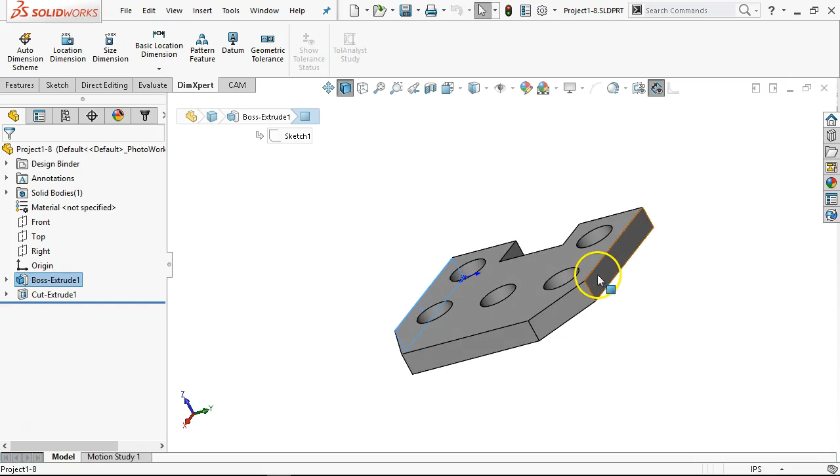For any kind of production, we may jump up to 5/8 and order 5/8 by - our width is just shy of 4 inch - so if I could get 5/8 by 4 inch wide, I could sneak that in there. Then I would have a bar stock that I'd be cutting off to whatever 5 or 6 inches, leaving a little bit oversized, so not quite 4 3/4. I can come up with a bar stock so I wouldn't be recycling as many chips on an 1/8 of an inch as I would with a 1/4 of an inch, but I'm a little bit closer. I'm also now holding on to, instead of a full maybe 1/8 of an inch, 60 thousandths, so my tool is staying far enough away from the vice jaws.

Whether we're given that information and the machine shop manager or production manager comes in and says here's your stock program, or we sit down and go through that same thought process of what am I going to pick for material size, and how many are we going to run - first question is how many are we going to run? Are we running 1, 5, 10, 100, 1,000, 10,000? That's all this part - this part is all that machine is ever going to run in its entire life. Then we make decisions based on that production schedule.

Tooling comes into the next place. Do I do this with one? Do I need to make 2 tool changes, 3 tool changes? We're going to assume aluminum. But if this was 440 stainless, I'm going to make a different set of assumptions, different choices in the tooling and the rigidity of the setup, and just about everything else that we go with.

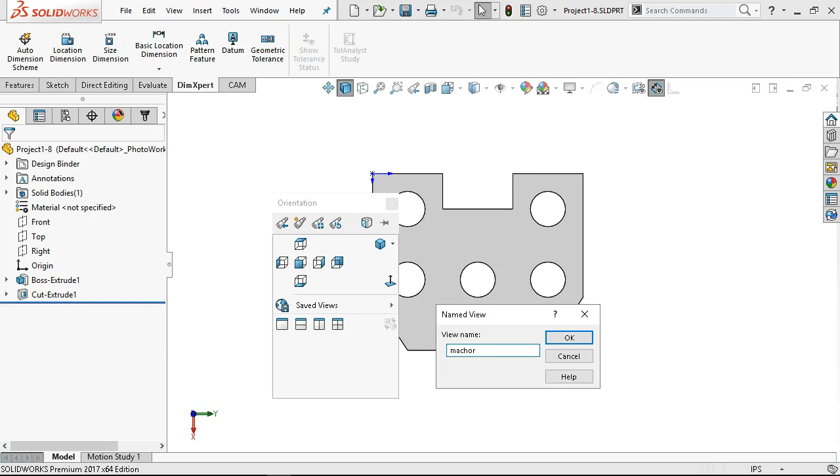The process then is to hit the space bar, and I'm going to have a saved view. Upper row, new view, and usually I just call it 'machine orientation,' something like that. So that is the orientation I'm going to machine in. What that does is I rotate around and see something over here. I hit the space bar, and I can get back to that view because it's now saved as a semi-standard view.

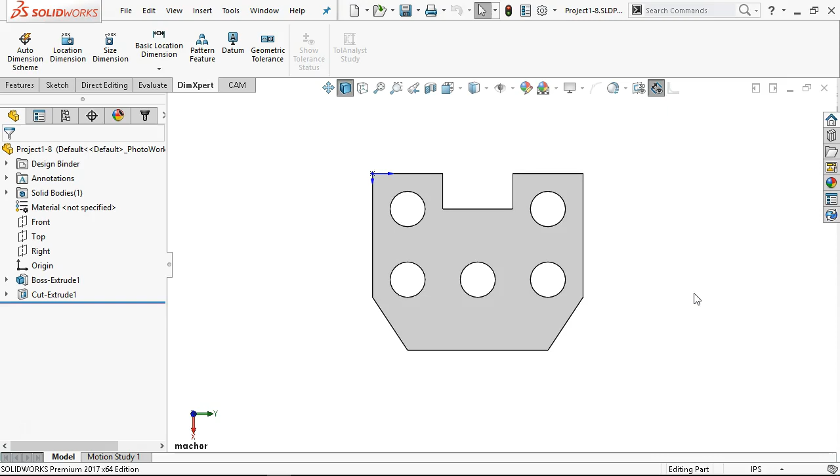Machining from this direction, what am I going to do with these corners? My round tools do not cut square corners. So I go back to the engineer, I go back to the machine shop manager, I go back to the customer, and I say, hey, what's the smallest radius I could put in there and still have the function? Oh no, you can't have a radius. Well, can I overrun the corner and not generate a stress riser? Well, no, we've already done it that way.

All right, then in the process of coding, whoever is doing the coding, we sit down and go through our manufacturing processes. I'm going to run this out, and then I'm going to have to set up another operation to come in and blow out that center section.

That leads to the question of, do I just run around the outside as a profile and leave that in place, or do I go ahead and cut most of it out, knowing this is going to be fairly efficient in a laying-flat orientation? When I set it up on end, I'm going to lose that rigidity, and this is going to sing more, so I may lose some finish even as I'm squaring out those corners. Well, I'm going to say you can go put an 1/8 inch radius in there if you want to, or we'll set it up as another operation.

Yeah, pretty much. But even stacking them up, gang milling a group like that, if it's a tight tolerance, and I stack them up, I get a little bit of angle, I get something on there. I'm not sure that I'm going to trust it as much as an individual, or even two. So the gang milling is on the table if this is a fairly open tolerance, and I can close it in the vise in such a way that we can get a clamp across the span of 10 or 20 parts stacked up without getting some kind of angularity in there or having one fall out of line and shifting.

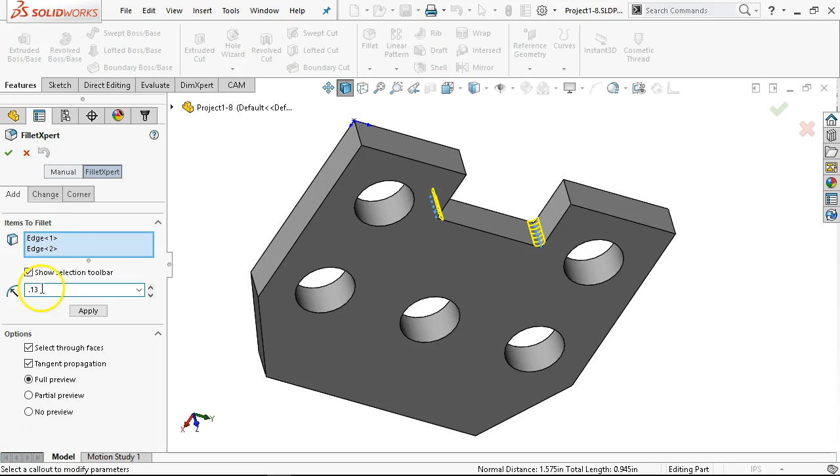So as a design for manufacture that we were talking about earlier, if I need to put in an 1/8 inch radius, this is one where I bump the tolerance up to where I have a little bit, 5/1000 over, on a 1/4 inch end mill, 125. Having that little extra puts just a tiny arc in that corner, as opposed to coming to a stop or a sharp change of direction. It's very minor, but if I have at least that much, I can use it to my advantage.

This makes it to where I could potentially machine this with one tool. But is a 1/4 inch tool going to be the most efficient to run this part? Probably not. So if I can blow this out with a 1/2 inch tool, change into a 1/4 inch, and come back and maybe do this relief, I can live with that. I'll get most of my geometry. I'll have a larger radius in here that I have to contend with, but then my 1/4 inch tool can come in and just feed out.

So I have a plan. Is it a good plan? Won't know until I get it to the machine and actually start making parts, and see if the cycle time matches the estimate from the operations and the CAM software, or if I missed it, I can't run that fast, or I need to come up with another strategy.

To that end, I will give away my favorite... oops, wrong one, did not want to hide that.

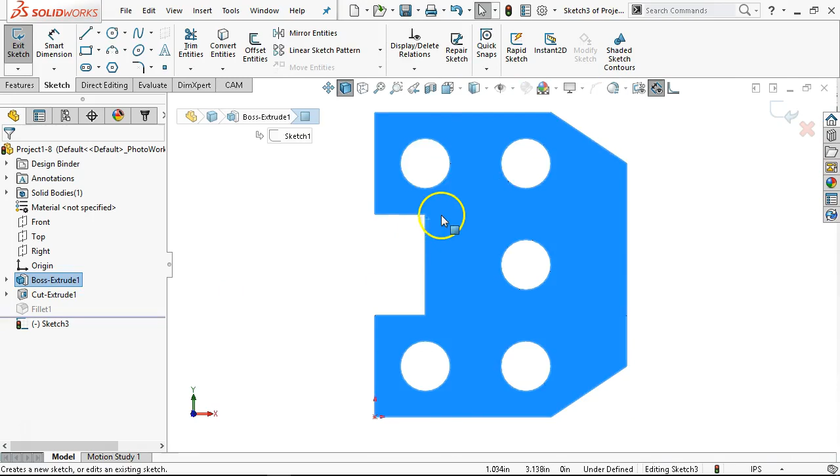The other thing is, if that needs to be a square corner, it's going to intersect, and I'm allowed to put in the corner reliefs. I like to do a small section, so a 3-point arc, go back to the end point, drag that out a little ways. Rather than just drilling a full hole in that corner, I want my 1/4 inch end mill to be able to just take that little dive in there, or mostly in there.

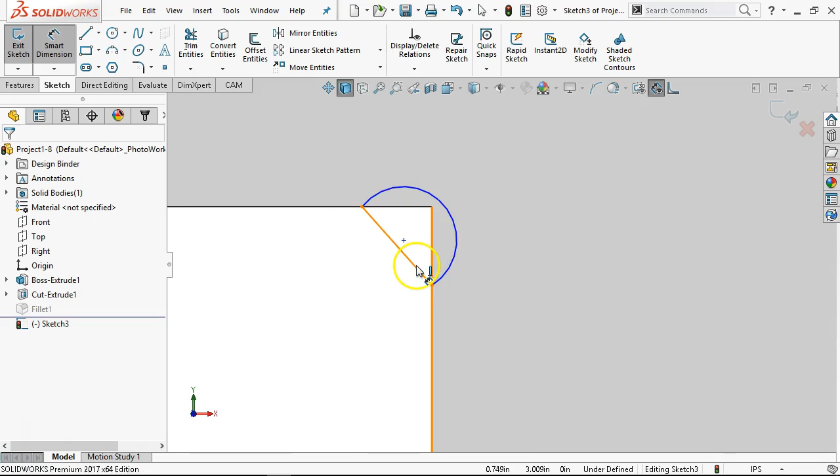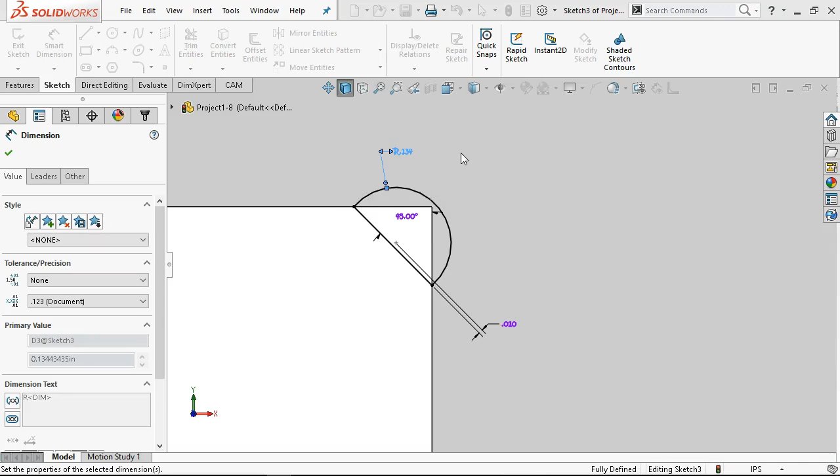Let's see, we'll put 10/1000 of clearance, and not have to change anything too drastically. So 45, and then we said we're up about 130. We'll set a center line. And all of that gets mirrored.

Features, extrude cut, through all. Now, the documentation side is I made this change per a request, a manufacturing request. How do I make sure that this gets back into the engineering documentation? If this is the engineering document, I've just made the change, it was approved, there shouldn't be an issue.

But if we have a set of policies and procedures that says I have to submit this, it has to come back, somebody has to enter it, somebody has to approve it, and then it gets back to me, I can't just make this change. Somebody's got to write it up. I go through the whole process of getting there. So if I make this change on my own, I may be opening up a can of worms. So I don't make this change on my own.

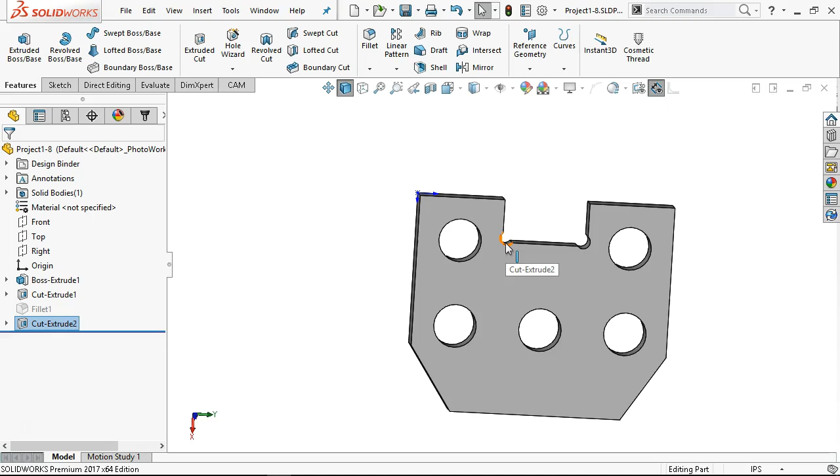Would you explain again what is the tool path that allows you to make that is preferable or desirable?

So if this is fitting into a corner, I want to be able to go into the sharp, so the corner of the part that fits in here will go right to that piece. The 1/4 inch end mill will come in, it will remove most of this material depending on how I tell it to do the operation. It gets down into this corner, and it'll take just a little zig, as opposed to being a full circle and either drilling out the corner and having a complete overrun. To me, this is less interference, less material.

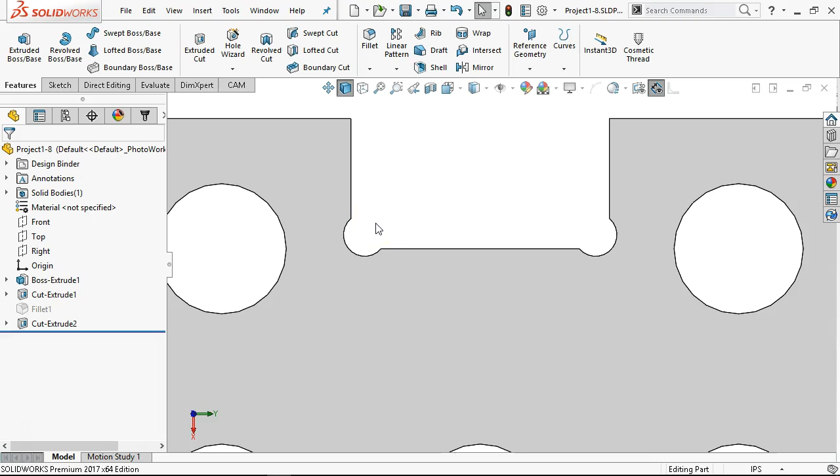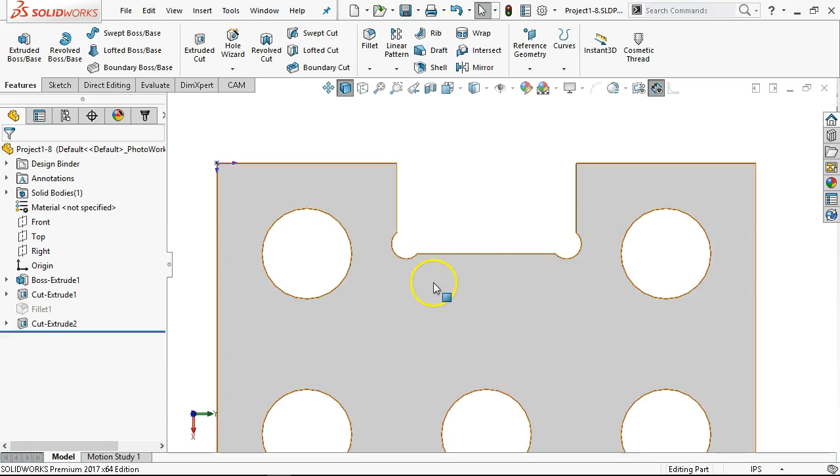From a stress-strain standpoint, since I've taken less material out, this is still going to be stronger, less of a stress riser from being a sharp corner, and I've also improved the machining process. I don't have to take a drill and drill out that corner or go into that corner some other way. So I call it kind of a truncated Mickey Mouse here, as opposed to, well, let's go ahead and suppress one more time since I like my corner geometry.

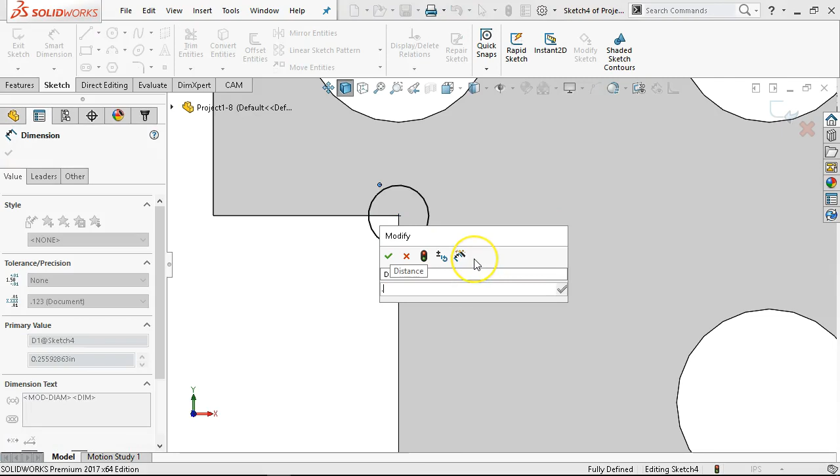A lot of times you'll see that it is quicker, it is easier just to go, let's put in a 1/4 inch tool, we'll put in a 1/4 inch drill, and we'll blow that hole through.

And let's see if I can overlay that sketch on top of it. I probably have left at least 50, maybe 60% more material. And I have a more efficient toolpath. So I could argue it both ways.

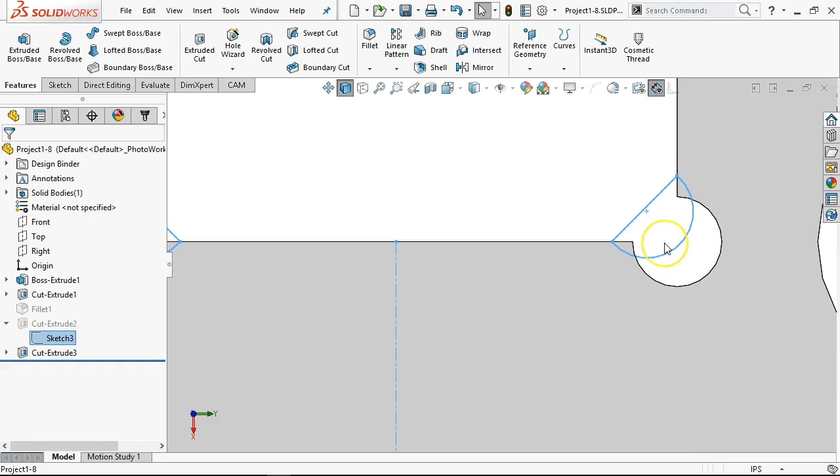If this was a manual operation, yeah, I'm gonna be okay with doing the full corner, because manually I can set up a drill and blow those corners out. But when I have access to the CNC, I'm gonna go with the truncated version.

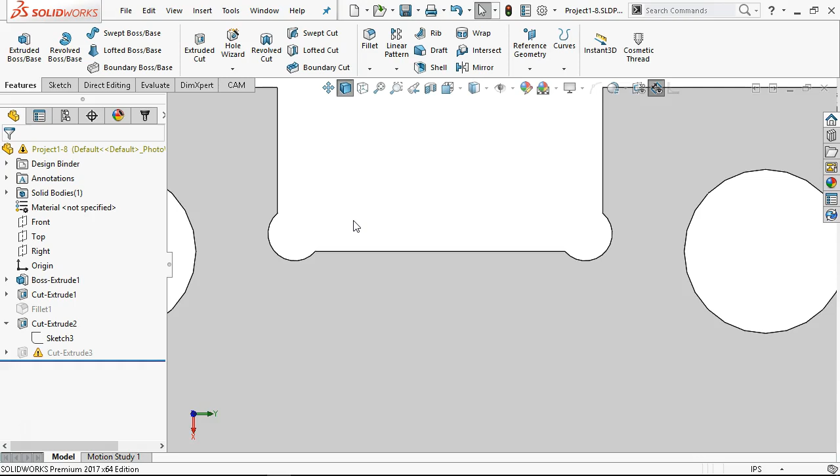So again, this conversation needs to happen way before we get to this point. When we're doing the initial planning, either the machine shop manager or production, looking down through these parts - can I do this? Can I get away with this? This is going to drive decisions that we make in our machine processes further along.

All right, so we'll see what the results are. So since that one is erroring because I'm using similar geometry, that can go away. And the absorbed feature is the sketch, so we will delete it as well. And put that in. All right, so we've made some choices.

We have 5/8 inch material. I have 472, so I'll probably go ahead and run the face cut across the top. What did I say was the width? Just shy of 4 inches. Well, we can find a 4-inch or a 5-inch shell mill or face cutter to take one pass on. I'm good with that, we'll load that up.

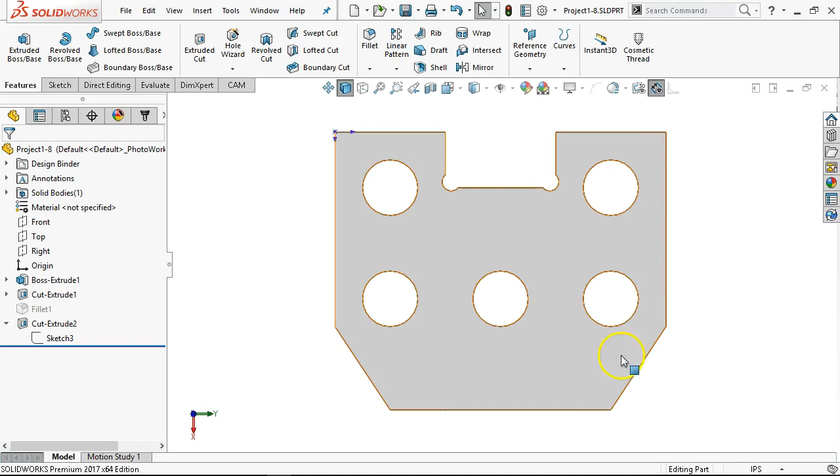We'll take the 1/2-inch tool, run around the outside, get into the corners. The 1/4-inch tool can come in.

The bores then 787. Do I load up a drill or put the 1/2-inch tool into that as a helical spiral? I don't plunge end mills like I would the drill, but I could set this up in a pretty aggressive helical spiral and blow that material out, finishing it as fine as I could with the drill - 787 plus or minus a thou or two. I'm going to put the end mill in there over picking a drill. One less tool change, one less tool to set up, one less tool to be concerned with wear. So that's kind of my decision tree.

All right, so we have a plan, we're into the operation. So we come over to our HSM tab, set up the new job, and then we went through the process. No additional stock - I'm going to control stock at the machine.

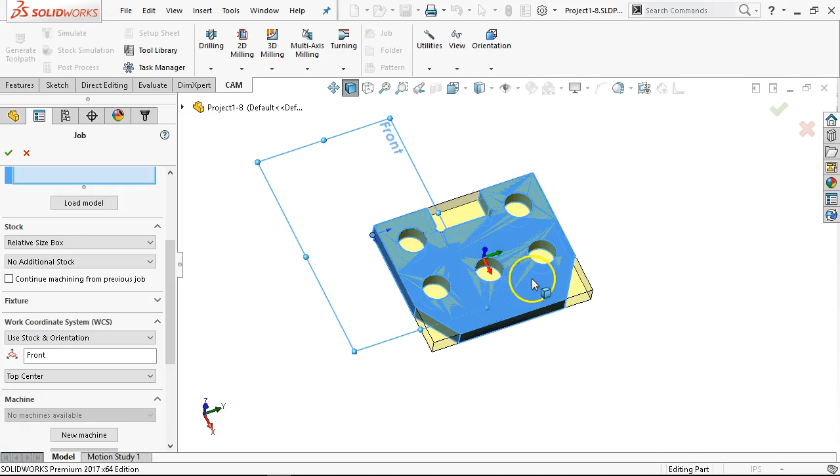So when I set this up, whatever we saw cut, I'm going to measure, and if I find one that's way undersized or way oversized, I'll kick it out to the end. But the majority will be within 10,000ths of each other, so my numbers are going to be fairly nominal.

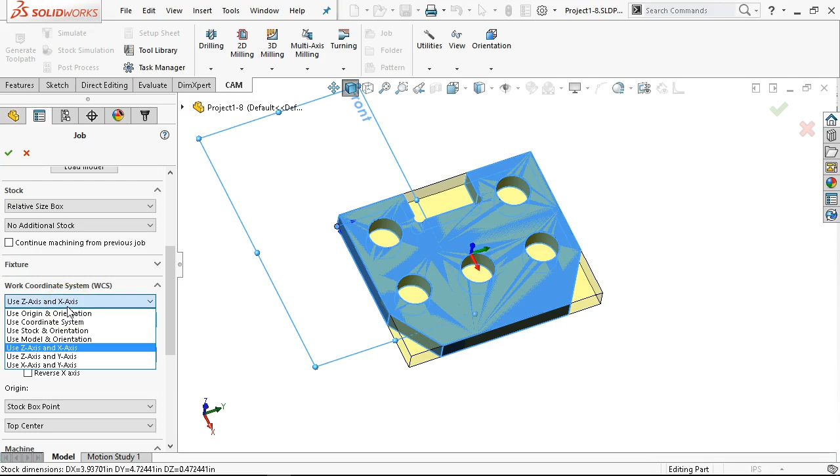We have, let's see, stock and orientation - that went to the front plane. So origin and orientation, if I set up a coordinate system, then I would have to pick for it. Z-axis and X-axis, that's going to be my preference. If we wanted to pick Z-axis and Y, X and Y-axis, we could.

But what that does is it allows me to select that face. And I think last week on assignment 1, I got those backwards, so kind of go through and experiment with the different selections there. But I think I use Z-axis and X-axis. I've used it for so long that I don't even look at that anymore - it's just one of those settings that's in the background.

We picked a face, then the next one is to pick the X-axis. It shows the direction, and if I reverse that, then my X-axis is going the correct way. And then I will go to model origin, or no, selected point - I want to pick where to place it, because model origin down there doesn't help me, it's at the bottom of the part. I want to be at the top of the part with my X-axis going in that direction. That puts it where I want.

Okay, so let's see which one will do this. I think these stay modal - yeah, or they should stay from one job to the next, from one session to the next. We'll find out.

If we have a naming scheme for our programs, most of the posts are going to accept a number for the program name, and then we can put the comment P1-8 setup 1. Work offset will stay with G54.

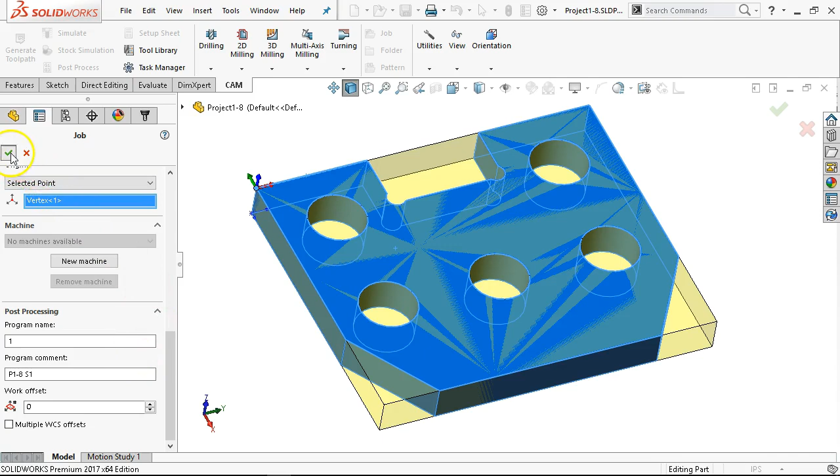All right, first operation, I'm right-clicking just out in the area. In other programs you'd click on a specific button, but I guess they changed it - you can click pretty much wherever you want now. So I stand corrected. We're going to do the 2D milling face operation.

We talked about last time running back and forth, so this time we're going to set up a 4-inch face mill. We're going to see what we can find for a face mill, and there's nothing in the list, so let's cancel out of that.

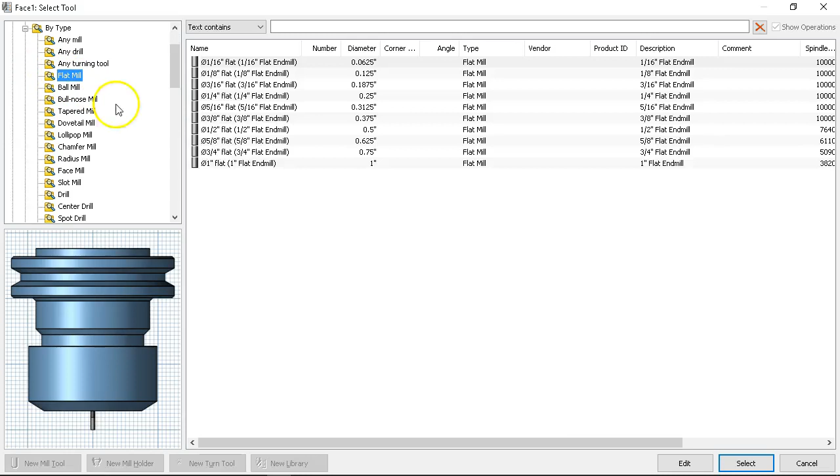Well, let's go ahead and pick a tool. If I don't have a tool selected, the operation goes away. At that point, I can at least preserve the operation as I've set it up. The 1-inch tool goes in and starts to run. I don't have to, even though I'm at the very start, flat kick that out.

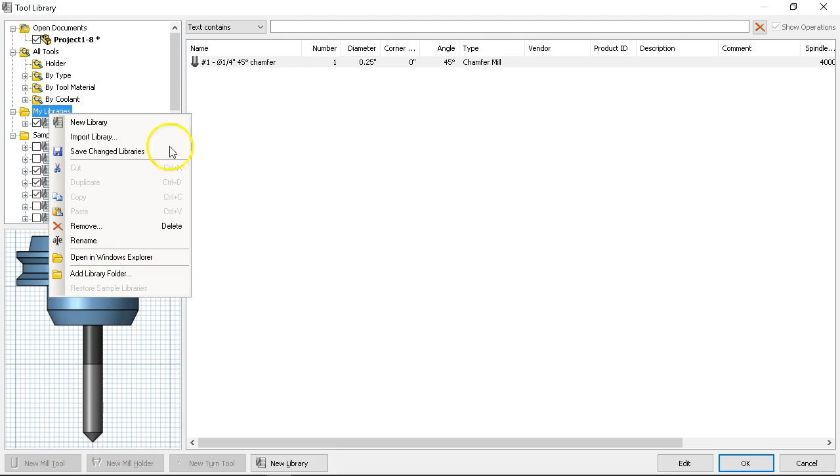So back into the tool library. We have a custom library started, so my tools will go in here. Most all of these folders are going to be set to read-only permissions, so they don't let you change the default. So my library, right-click, create a new library, and then this will act as the library for these custom tools, or a job list, or whatever.

In here then, select those - there we go, new mill tool at the bottom left. And we're going to set up for, because I want this to go to the next number in the sequence when I add it, these are all zeros. Numbers, zeros, and these will all line up to 0.

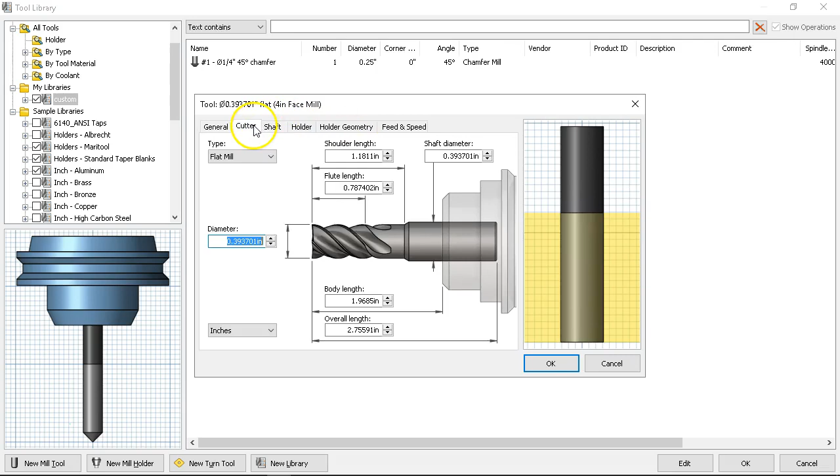And we're going to call this the 4-inch face mill. I don't know how many flutes, probably 6, at least 4. All right, so the cutter, we go over to pick our face mill.

Try again - so multi-insert. Flute length, I'm going to stay with their numbers because I'm not looking for interferences. If I have this shell mill in front of me, I can take measurements. What I'm really concerned with is that I get it to 4 inches, and that if there's any back angle or whatever, I have an actual number for what it will take for a pass.

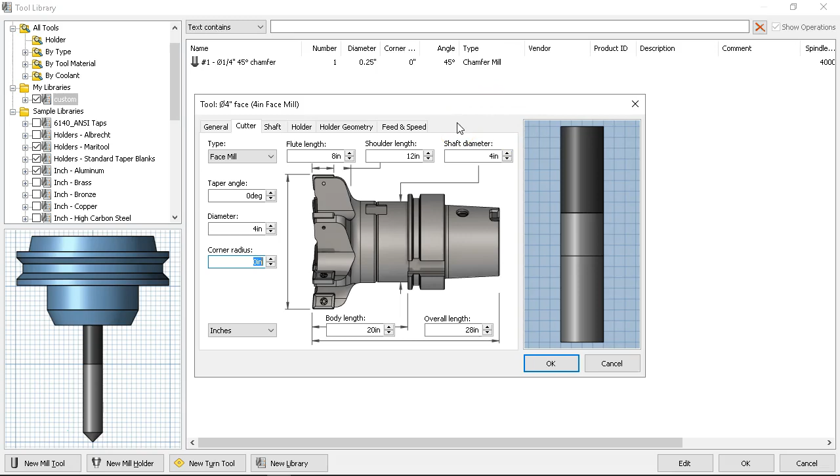I don't want to set this at 4 inches and find out that with the back angle, or what are they calling it here, the taper angle, that I can only cut 3 and 3/4, and then it ends up that I take the first pass, it doesn't clean up all the way, and then I have to go back and tell it to take 2 passes. All right, so we're going to verify that it will actually take a 4-inch wide pass.

Shaft, not a big deal. Holder geometry, feed and speed. If I know that I'm running this pretty consistently, this may be where I would set up this tool for aluminum in my C2 inserts, or set it up for steel in C5 inserts - one running faster, one running slower.

All right, so don't need 2 decimal places. Don't really need 2 decimal places on the ramp either. And then cutting speed, 13 thousandths per tooth. Let's drop that down to 2 thousandths per tooth, but we have 4 teeth, 5 teeth, something like that. And so that's putting me at a cutting speed of about 7. Bump it up to 8.

Go ahead and stay with the ramp feed, we're not going to plunge this. So if it does accidentally plunge for some reason, the slower the better. I want to catch it and watch it try to plunge for a long time before it actually touches material.

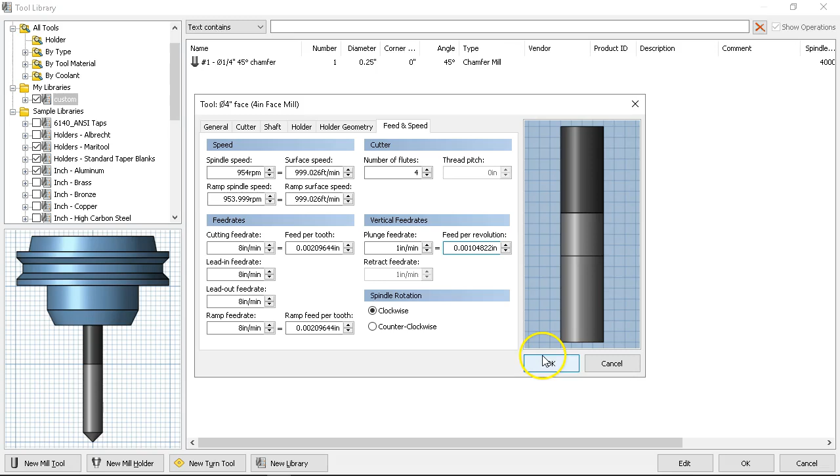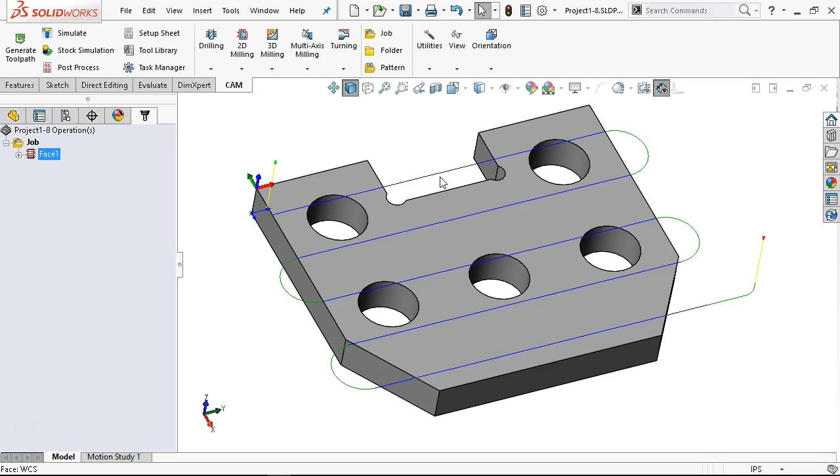All right, so these are guesses. I've gone through on my numbers, and we get it out to the machine and say, yeah, that ran fine, left a beautiful finish, got exactly what I wanted out of it - or no, I overrode it up 10%, I overrode it down 10%. I get some actual numbers, I can come back and feed it into the database. So next time that I see that tool and load that tool, it will have those similar numbers in it.

Okay, edit, back to the library, go to my custom - now I have a tool to select.

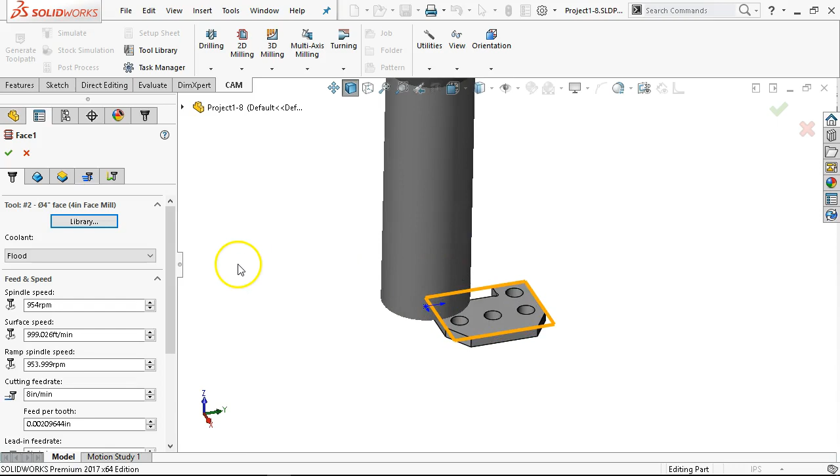Well, it doesn't look like much, but that's pretty much all I need. It looks like a big end mill. All of the numbers that I set in the library came across, so I don't have to change anything.

At some point we're going to start building our own library of tools that we use. If it's the side mount tool changer, having a tool crib with the first 8-10 tools already loaded. Carousels don't lend themselves that well, but maybe the same thing applies for the first 2 or 3 tools that are most common, and we use them over and over again.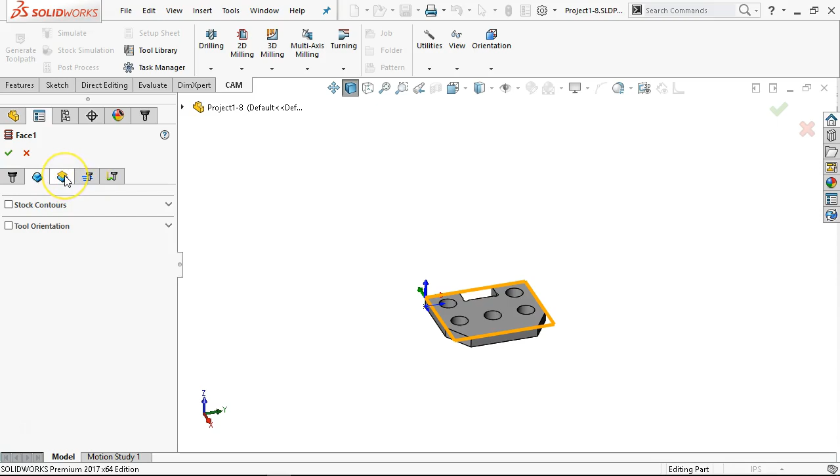For a face operation, it's going right to the stock contour, finds its way around. We're not trying to avoid anything or go through.

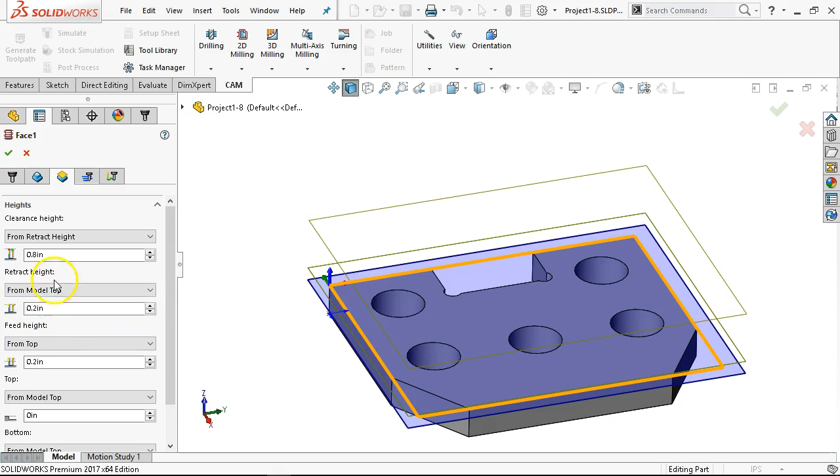Let's see, 0.2 and 0.8 and 0.2, model top and 0.0. I'm okay with that for the facing mill, the extra 0.2. What this is going to do then is the feed height and the retract height are both going to be... let's go, well, that's not great, but it's pretty good.

Feed and retract, I don't need to adjust. But if this really what it comes down to, if the feed height was something I wanted to put at the bottom of a pocket as opposed to a slow feed to some additional depth, the retract would always be up here and I could feed to something lower. That's why there's 2 numbers there.

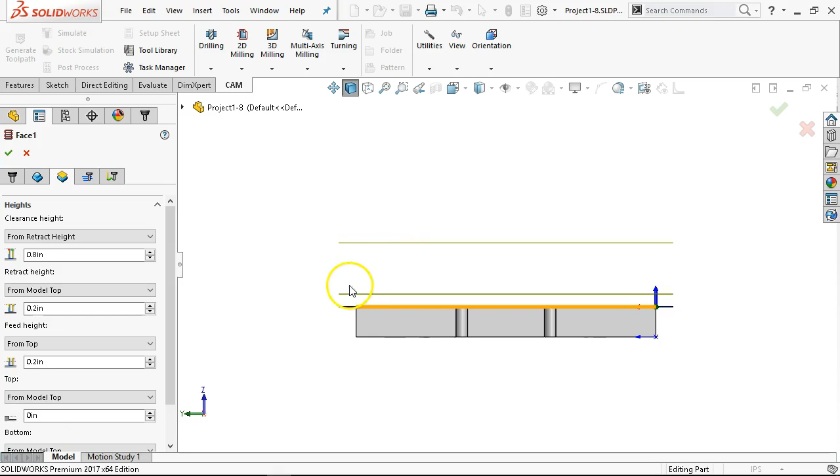As long as those numbers are the same, we're 200 thousandths above the part, the 0.8 gets added to it, so I will see a clearance height of 1 inch and the retract at 0.2. That's going to give me enough to feed in and be able to work with.

Going into the face, full width, I'm going to give it the full 4 inches as a step over so it doesn't try to take a second pass.

We're not at 0 degrees. We'll see what 0 degrees is. There shouldn't be a pass extension. Stock offset, well, we got a little bit to work with. And we're going to machine both ways, so we'll see what that does.

Lead in and entry of 0.4 is above the part. So I'm kind of jumping over the first part, lead in, lead out, smooth transition. Let's see what it generates.

All right, so we come in, it has enough to clear getting into the part. Center line of the tool finds the edge of the part, starts leading out. And since it's ramping out, it should be a transition.

The problem is going to be we're going to have swirl, swirl, swirl, swirl, and then the back swirl is going to be kind of apparent in that last segment. So if I want a consistent finish all the way across, I really need to extend that lead out.

So it would be one of those things we get out to the machine and see pretty quick. So let's see, if I turn that off, and that was the angle.

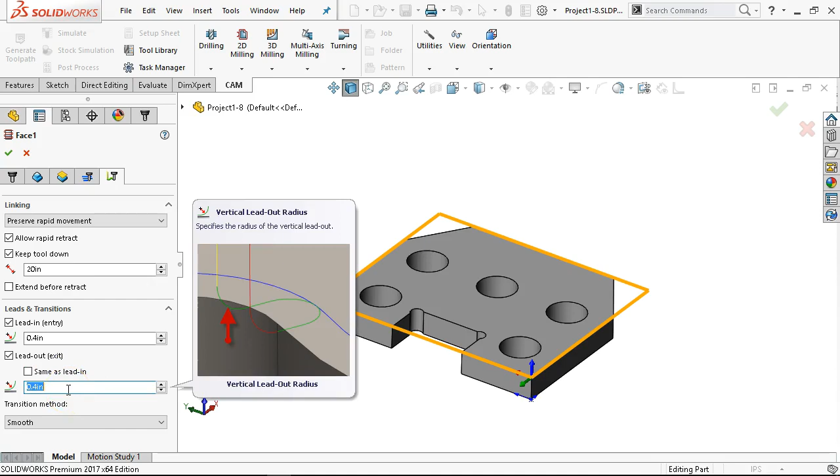Oh, there we go. Extend before retract. That was the one I needed. So this one can stay same as lead in. The button extend before retract should bring it all the way across. All right, so now I have a consistent finish.

The profile then, so I lost my frame of reference. Going to go back into that, space bar, get the machining orientation. We click out, that toolpath will go into the background.

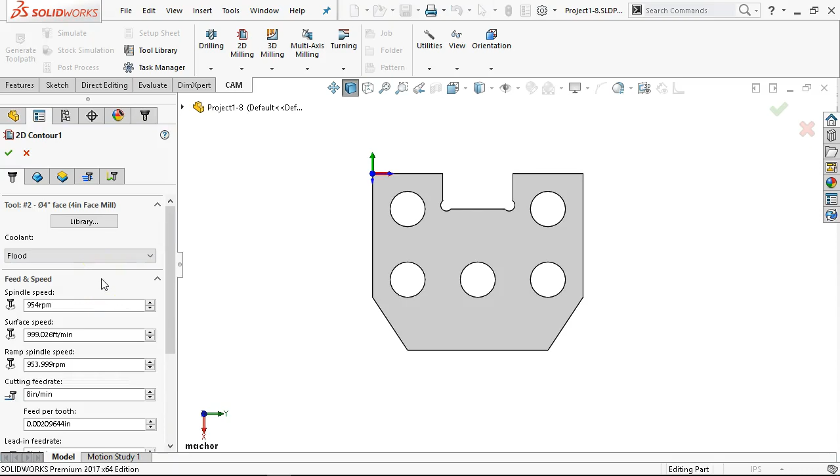Next, we'll go ahead and set up for the 1/2 inch tool. 2D milling, let's go ahead with the 2D contour. And let's see, I want to rough, but I want to finish just on this inside pocket with a 1/4 inch tool.

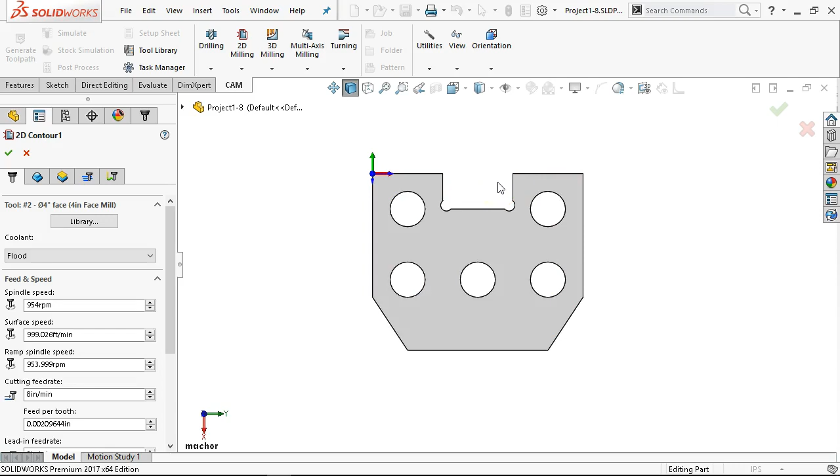So when the 1/2 inch tool comes in and blows that out, when it comes back and finishes the outside of the part, I want to jump across that gap. So I'm going to have to lie to it. I need a sketch. All right, so I don't need a sketch right now, but we're going to here in a minute.

All right, so tool 3 then, we're into by type, flat end mill, 1/2 inch, and select. All right, so it came up with numbers.

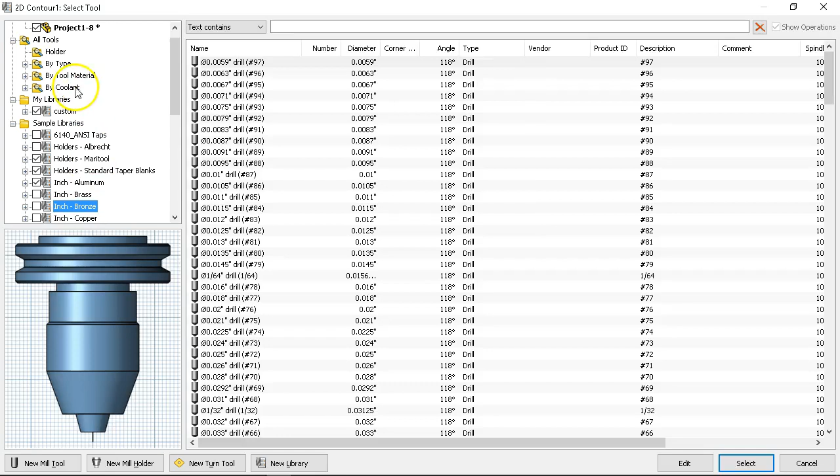I'm going to use this tool again, so I'm going to go back into the library and, oops, I jumped over something. So back into that one.

So at this point, if I change these numbers, I'm going to get a little aggressive on that one, so 1200. I pretty much run the 1/2 inch tool at 9000. I'm going to stay with the 2 thousandths. 54 is a little aggressive for the first part, so we'll bump it down to 30, but I'm going to be prepared to move that back up when we get into full production.

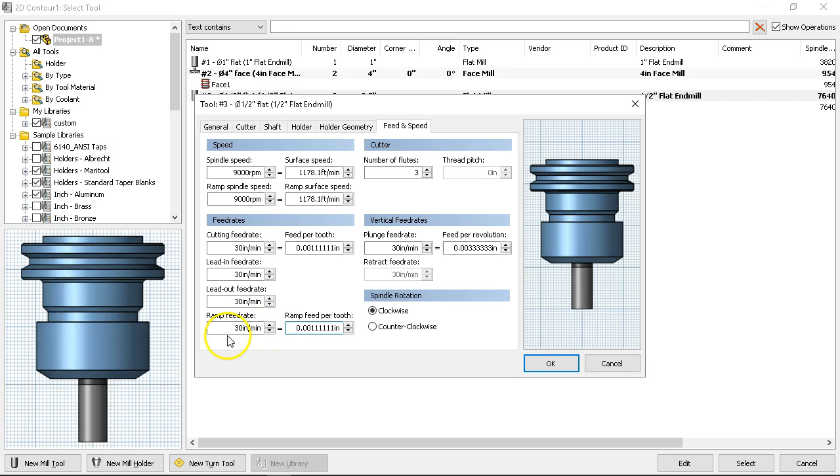All right, so what that means is it should take less than a minute to go around the outside of this part and be ready to finish.

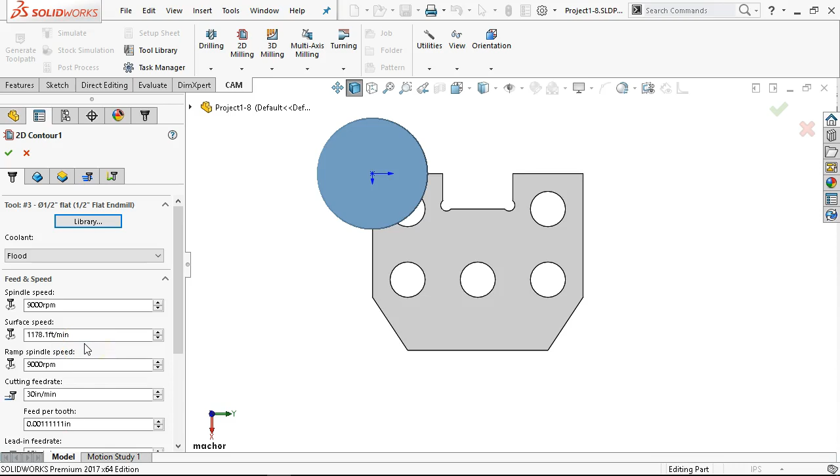Following operation uses tool, but with different speeds. Oh, and yes, we want to update and change. Select - there are my more aggressive numbers. So the next operation that I put in will go back to the current library, not the database library - so where I pulled that tool from, it will come back to this one and reproduce. If I use this number enough, then I'll want to add it to my custom tools or to a machine library.

Okay, the model - I'll rotate over a little bit. I would like to start on this corner, probably just out of habit. And I'm not worried about my reliefs in the corners. It's not going to put that 1/2 inch tool in there.

Tangent propagation says find everything that is connected by a radius. Propagate along Z says everything that's connected on that part. If this was an open profile, I could take the propagate off and say just finish that edge. And there's only a little bit of tangent. If I started here, this would be - no, it still comes to a point. There's no smooth transition, so there's no tangent propagation here. If we had radiuses on each of the corners, then we could have tangent propagation.

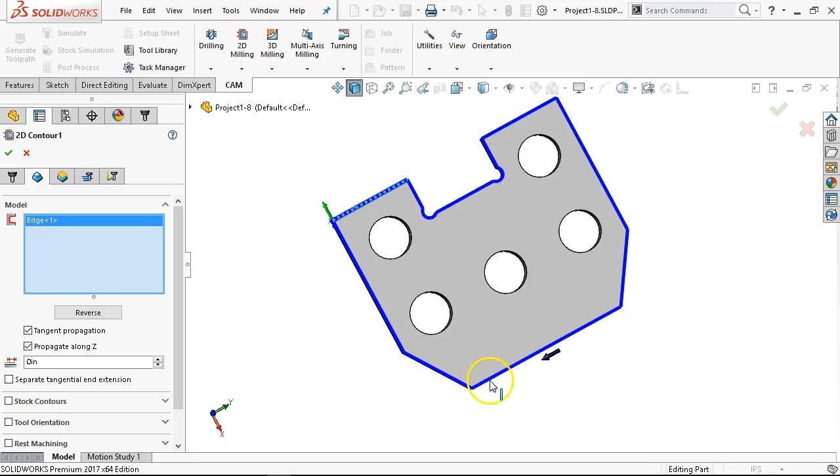And direction-wise, let's go ahead and highlight the edge again. I thought I saw it, but then I started pushing buttons. I'm looking for the little arrow that should be out there. Let's jump out of it, jump back into it, highlight. Oh, I lost it, it jumped over here. Okay, so wherever it puts the little arrow, I'm now doing the imaginary - my tool is spinning this way, running along that face. I am climb milling, and I'm on the side to actually remove the stock. So my quick verification.

472 deep on a 1/2 inch end mill. This is going to be a little bit tough, especially at 30 inches a minute. Do I want to try it on the first shot? Yeah. I may slow that 30 down to 20, 25, but I also may just be ready on the override, the feed override, and drop it down 10% a couple times and work it back up.

The main concern being that going around the outside with 60 thousandths, heavy corner, getting into this pocket, that's a concern. When I turn that corner and go full width, full depth, that's going to spike the load meter. We're probably going to go from 7, 8, 9% to 30 to 50% right on that first turn. That's acceptable, or run it.

All right, so retract heights - I'm not happy with these numbers. I'm okay with the adding, I just want better numbers. So I'm used to seeing 100 thousandths as my retract and feed.

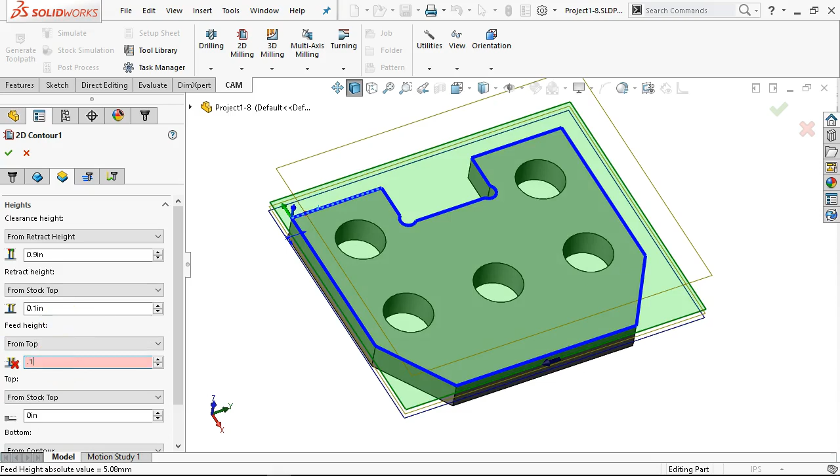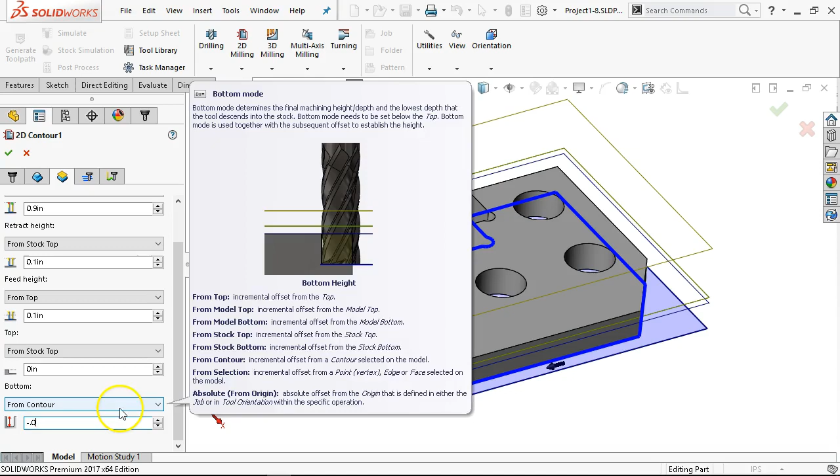From the stock top, well, we set the stock and the model top the same. From contour, and since I picked the top contour, that's 0. So let's go back and clear the selections. And what I really wanted to do was that contour, because that's going to set the depth automatically - I don't have to pick anything. I just have to tell it that bottom from contour, go an additional, what did I say, 30 thousandths to be able to clean up.

And it moved on me, so minus 0.03. And so it takes this cutting plane, this purple-blue cutting plane, and shifts it down 30 thousandths. Tool now overruns, and I still have my 80, 90 thousandths that I'm holding onto in the vise.

All right, so we took maybe 5 or 10 thousandths off the top in the face mill. I touched off, I did my probe, or I just went into the work offset and said subtract 5 thousandths, make sure this all cleans up. Run around the outside of the part, make sure I don't hit the vise. And then when we flip it over, we're machining off that 1/8 inch on the backside.

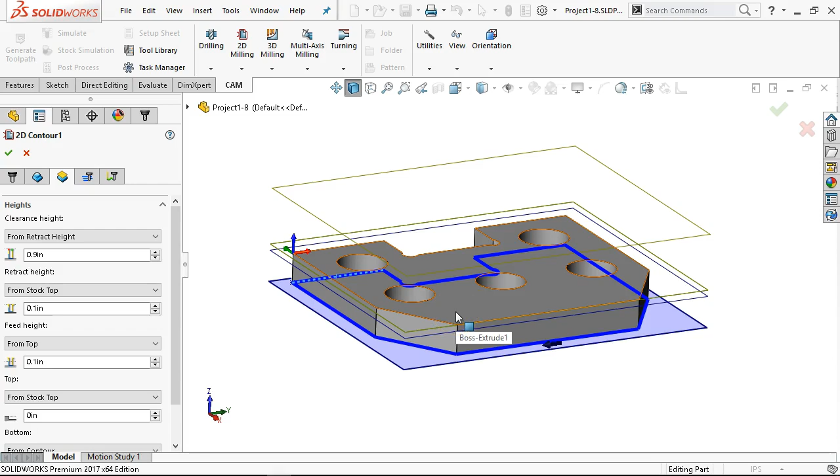Yeah, I missed something - you've got a lot more depth that the vise is hanging onto this. Yes, so this ended up being 12 millimeters, 472. And I said I'm going to pick 5/8 material, 4 inches wide, 5/8 thick. And then we're going to buy bar stock and cut it off to 4 3/4. Right, so that becomes my stock size.

I'm holding on pretty much minimum to be this aggressive, holding on by 80 or 90 thousandths, but I'm trusting the tool and I'm trusting the setup. I'm also trusting that I can close the doors and that the part won't come flying through.

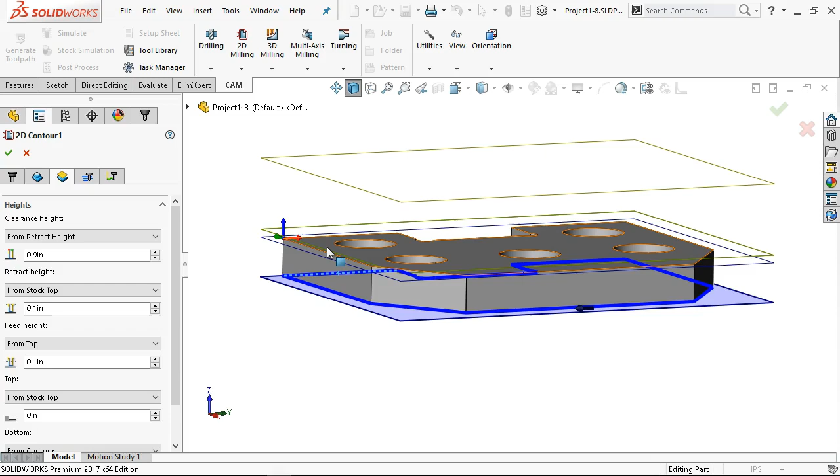The other side of it is we go up to the 3/4 inch material, and I have a full 3/16 to hold on to. And I would say even at 3/4, 4 inches wide, if I really lean on this vise, I'm going to be able to move this part, bow this part. Leaning on the vise at 80, 90 foot-pounds on the vise screw, I'm going to be able to bow this part 2.5 to 4 thousandths in aluminum.

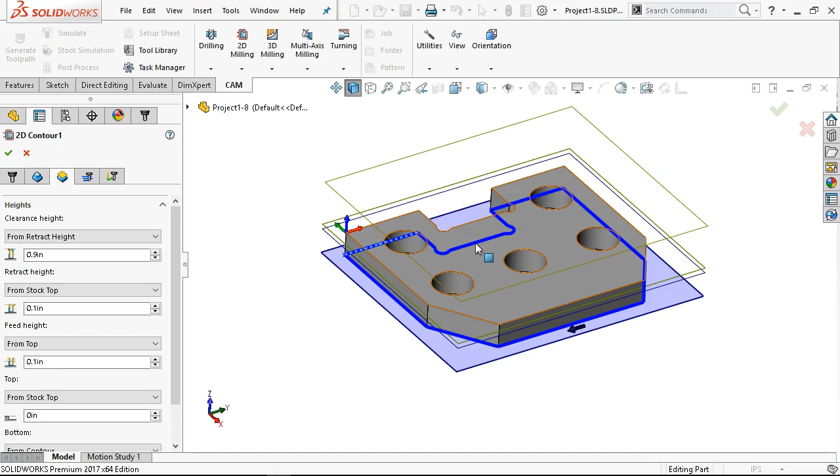Steel, okay, maybe a thou or two, but aluminum, yeah. So when we do the demo, one of the reasons all my machines carry torque wrenches with me is they all have the same squeeze. The first part has the same amount of squeeze as the last part. And if I don't like the holding, I can go up 5 foot-pounds or down 5 foot-pounds, and I'm staying in the same range.

Would you ever consider drilling a small hole through one of those, just to put a bolt down in and latch onto something to keep it? Sure, that's the fixture, yeah. We need a dedicated fixture.

The other side of this is, do we want to, plasma is a little ugly. Do we want to not really set up to wire? We would have to have all those holes. Plasma would blast through, water jet would blast through. So do we want to set up a full sheet and rough these out, and then have a fixture that comes in and locates and cleans up?

Because at least then we're putting as big a piece of material on the water jet or on the plasma, and it's going to run 70 or 80 of these, and maybe the kerf or the overrun or whatever fails 1 or 2 of them. All right, is that an acceptable loss? Maybe.

For the 100-piece run, that initial conversation, that would be something that comes up, is what's the fixturing required, and can, just like the gang milling, can I build a fixture that I can have my operator set 10 of these down, clamp them in place, walk away for 10 minutes instead of 1 minute, not have to tend it, go do some deburr, go do some surface prep, those kinds of things.

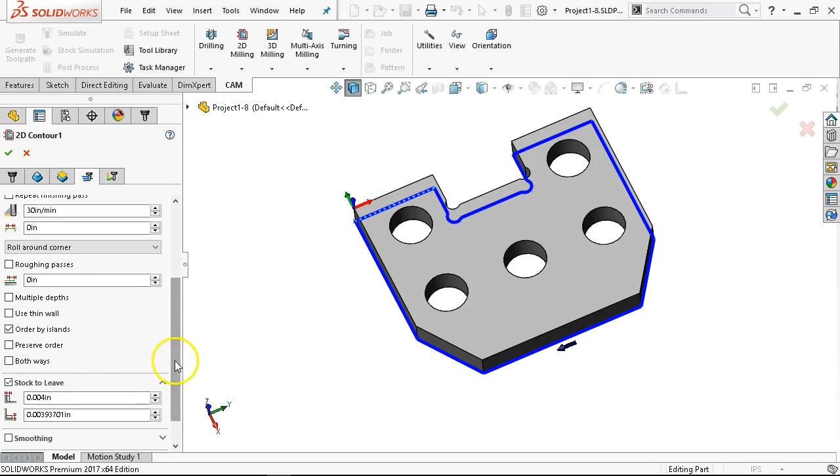All right, so getting into the material. Let's see, we're not really doing anything. I'm saying that this roughing pass is not going to leave any, we're not going to engage compensation for stock. And that one aggressive pass, I'm going to leave 4 thousandths of material. And we just subtracted 30 thousandths from the depth. So I'm not going to leave any stock on the floor.

Now that also does require that after I take that facing cut, I'm going to go back and put a pair of calipers on it and check the depth of what I'm telling that end mill to go, and maybe it's more like 10 thousandths of cleanup, but I'll at least start with 30.

And then lead in. Again, how much am I imagining that I have stock over here? 20 to 30 thousandths in this direction and maybe 60 in this direction. Then 50 thousandths and 50 thousandths with a 90 comes down on the part, ramps in. Would like this to be just a little bit bigger. We'll see what it looks like.

So 100 thousandths, and pretty much what that's doing is the radius of the tool plus what I put in here, plus what it's going to add to the arc on the end of that. So we'll see it, go ahead and accept it. And it started at the midpoint, which if we start midway on any part, we're going to end up with a blemish line. You're going to see a parting line that is there.

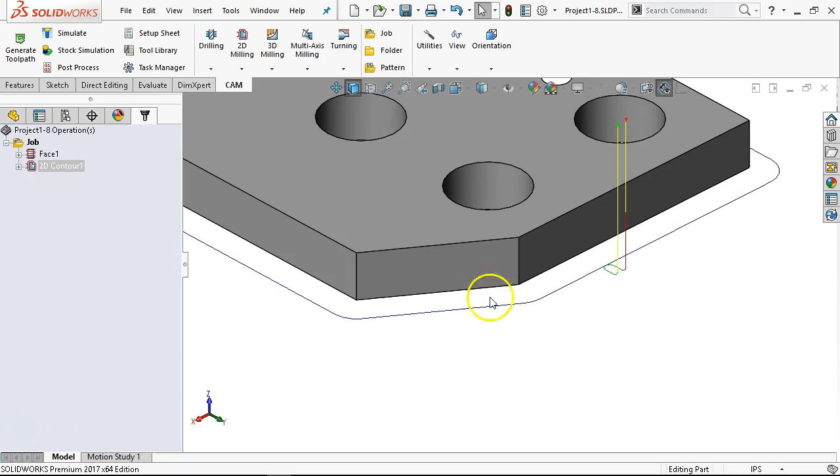So the red is my rapid down, slower feed into the arc. If this does happen to contact material, or is in material up to that point, it's at least a little gentler to get into the part, runs around, comes back, ramps out, lifts, and goes.

All right, so we need to get that onto a different corner. Going to edit, go back into the operations and look. We have an entry position. And so my entry position, I really wanted it over here more as a matter of course.

I don't see where we told it midpoint, but we did. If I get it to start on that corner, then I really don't need 90 degree at all. Where the face mill, that was just the closest point where the face mill was? Could be. I wouldn't always say that because it makes some really goofy decisions sometimes.

All right, so I turn the 90 degrees off, and that becomes a little stranger, but down, in, and around. All right, so I was looking to have those come off of the corners, but I may not have given it enough.

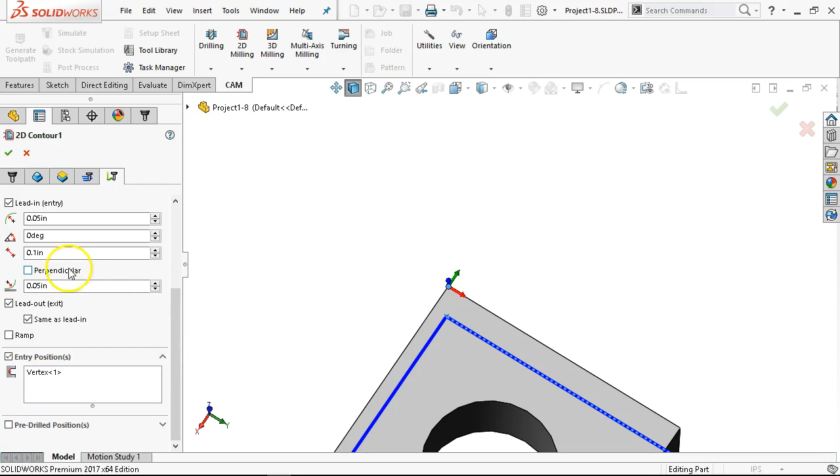Okay, I'm just going to increase those so we can see them a little bit better. All right, so really that's not too bad. We're outside of the run and it comes around.

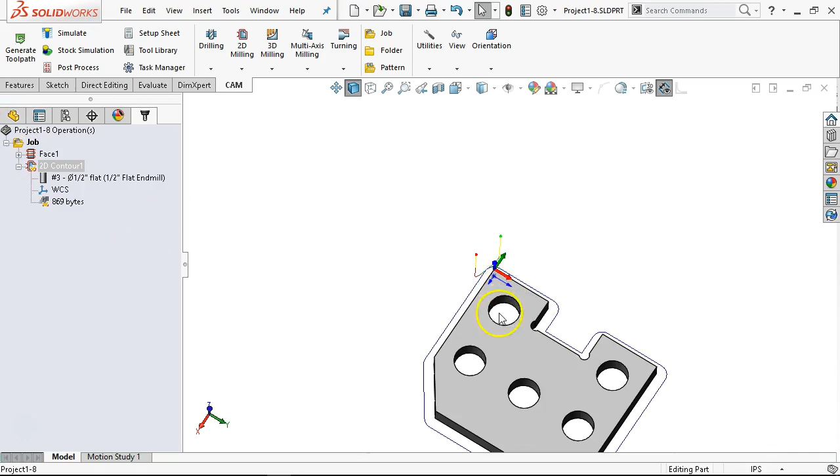All right, so it goes into the corner and we have 10 thousandths. I have the choice of drawing a sketch if I want to run completely around. But looking at this, I should be able to pick my way around to the corners, have that end mill end here, pick up over here on the climb cut.

If I do that as a sketch, then I only have one sketch to pick. So we'll do it both ways. Let's go ahead and make sure that that got saved.

I want this same operation, so I'm not going to start a new operation unless I can't duplicate what is already generated. So when I duplicate, I get the same tool, the same operation parameters, and then we're going to go in and clear selections. I'm going to take that propagate along Z off, and then select, select, select, select, and the arrows are still showing up okay.

And if this was more complicated with lots of small little pieces of geometry, I would go back over to the SolidWorks side, open up a sketch on that face, and darn it, I did it again. I know better than that. I am at the top of the part, not at the bottom of the part.

All right, so let's just use this as an example. The preferred would have been to select the bottom, and then I would draw my sketch on this one, and I'd have to change the sketch plane anyway. So things that you do in the background because you don't do them all the time.

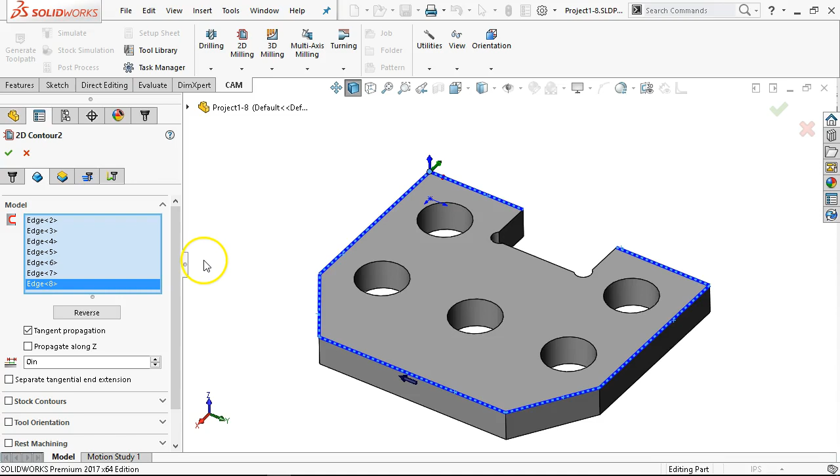All right, so that one picks the side. Now the difference here is that I went from contour and told it to go another 30 thousandths. Well, here I almost want to go to from selection.

So we can enter value, hard code values from top, model bottom, stock top, stock bottom, contour, selection, and absolute from the origin. Well, the origin is at the bottom of the part, so that might be one. And here, if I were to tell it to go to the model bottom, that shifts it down as well.

So if I can pick it, then it's going to continue to go 30 thousandths past. So different ways to approach the logic.

I would say just be consistent. The one that you are used to, or the ones that you want to make the selection. And so I would prefer to select across the bottom rather than having different strategies from part to part.

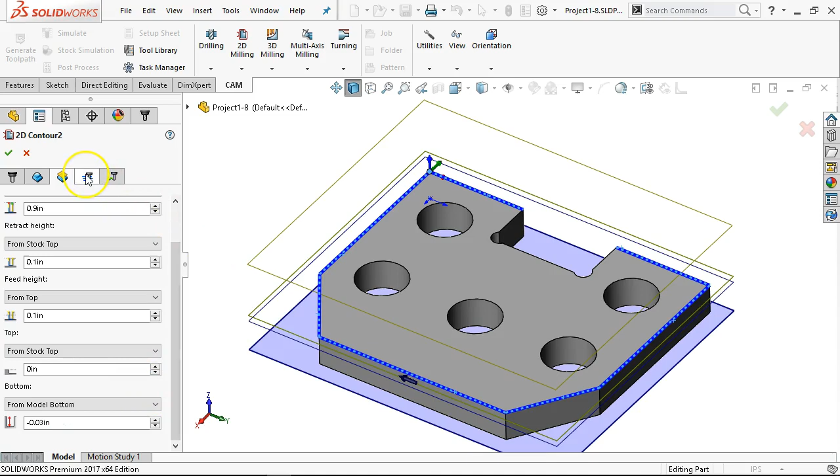This one goes to wear, which is going to initiate the G41, G42 for compensation. It's set for tool center line, so the diameter of the tool is 0.

Lead-ins should be okay with the clearance. I didn't see if it knocked everything out, but we didn't simulate. So chances are I left a nub.

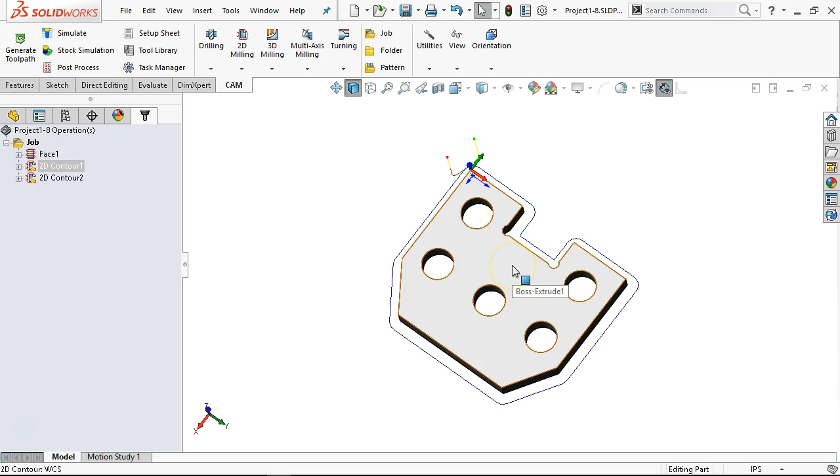Is it okay to have a projectile? Not really. Is the 4-inch face cutter going to care? Probably not. Am I going to have a bunch of little tabs in the bottom? Probably. All right, so those are questions that we want to make sure we have answers for, is this going to be small enough?

And what I'm looking for, let's just go ahead and jump into the simulation. Stock simulation all, and we'll go ahead and slow it down.

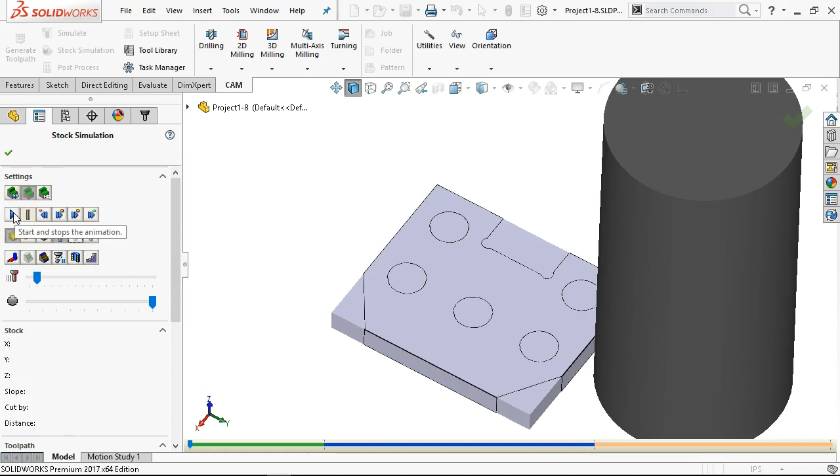Let's see, one of these, tool shaft, not so much. Tool holder's already off. Face. Okay, we can go a little faster than that. It's kind of a small nub.

And the corners, those are going to be stuck. I mean, those are also potential projectiles. So finish pass and out.

All right, so far I'm good. That's a little bit of a concern. Maybe not so bad.

New operation. Okay, so I'm basically starting with the holes. I could duplicate again, but I don't want to get too far into the contour with the settings.

All right, so I'm good with those numbers. My selections then, I'm going to go back to my strategy of the bottoms. What I want to look for is the occasional arrow that jumps to the outside. That would be a bad thing. And we're just going to, since we're going to ramp these in.

Oh, and I meant to do that on the other operation too, so we can set it here. 0.1, 0.1, and for safety, I'm going to leave that at 0 while I do this. All right, so I picked those as my numbers: 1 inch as the clearance, 0.1 as my retract and feed height.

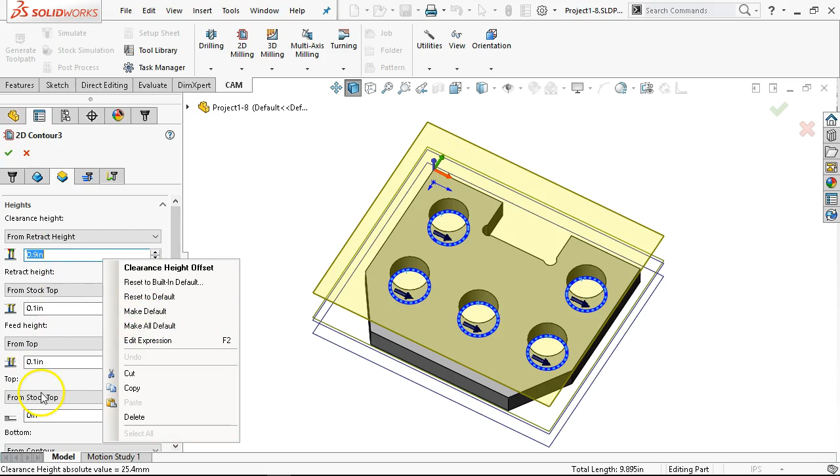Let's see, if I right-click and say Make Default, and then Make All Default, those are now my defaults. So you find numbers you like for clearances, you find numbers you like, right-click in this, and Make All Default takes everything in that property manager and makes it the default. So it'll take a couple of programs to get it working the way that you want.

We're going to stay with the minus 0.03. Mainly the 10 to 30 thousandths is so that when the face mill comes across, we'll have a little bit of burr, but we're not going to have a piece of really thin aluminum foil stuck in the end of each of those holes that we have to pop out.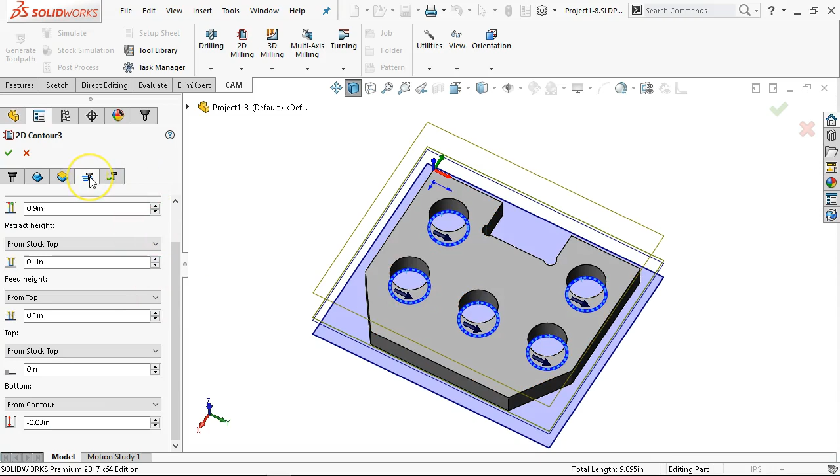And then we'll go ahead and initiate wear. Not worried about depths, not worried about stock. So all of those look pretty good. Allow rapid retract coming out of the holes. There's nothing in the bottom of the geometry to keep the tool down, so not worried about that.

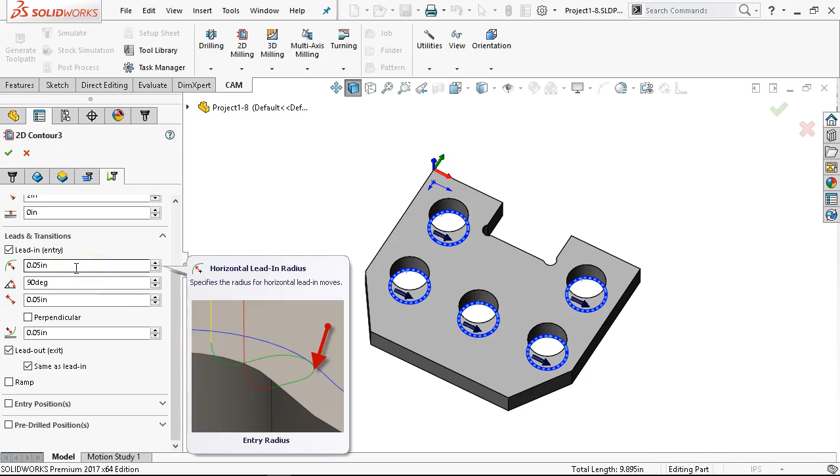Lead in, lead out, fairly small. A lot of times on the contour I'll default that to 5 thousandths rather than 50 thousandths. Keep it really close and then step it out, especially for the bores where the half-inch tool is really close.

So it'll calculate, is 20 degrees greater than the 0.2, or is 0.2 the greater, and it'll take the lesser of the two numbers. Not sure I said that right. We'll see it in the helix.

All right, 0.1. If everything else touched off okay, I'm going to bring this down just a little bit closer, and we'll accept. All right, so spiral ramps in, takes one pass around, retracts out.

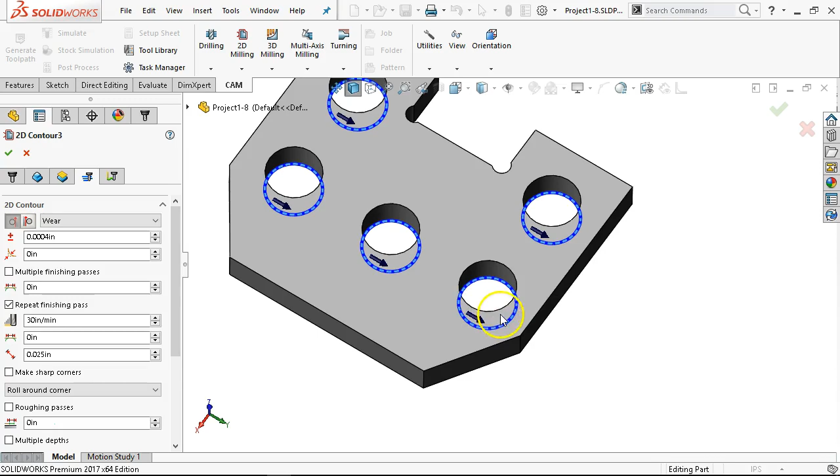If I decide, now one of the things is because this is blowing out all of that material and removing it, then let's go back and see if I can find it. We're going to repeat the finish pass. So it hits the bottom, and instead of stopping, it goes around one more time before it does the retract. I'm okay with that.

All right, so that contour ended over here. It jumped to that hole. The other thing would be to, if I wanted to preserve the order, let's get back into the edit. Lost it. Where did you go? Okay, preserve order. That should be the order that I selected. Since it started here, I now expect it to come over here.

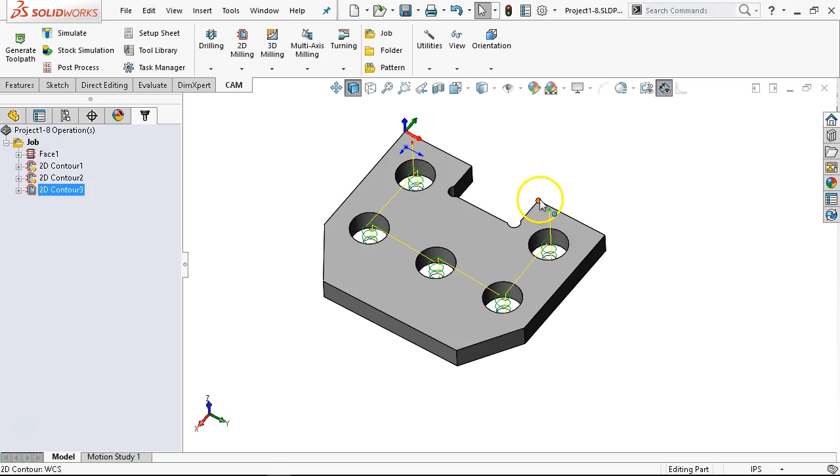So pick, pick, pick, pick, pick. To make that change, to make that adjustment, since I can't really reorder these, I'd have to remove them and select them in a different order. Okay, not a big deal, but I'm not that concerned about it.

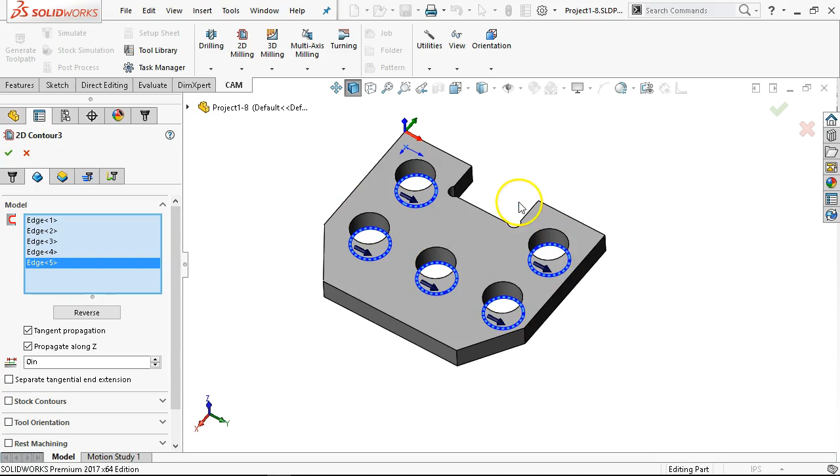The jump from here to here versus here to here on a rapid, I don't know. We could argue that one, I guess. All right, so we've blown that material out.

New operation is going to be back into the contour. And library tool by type, flat end mill, 1/4 inch, and select. 10,000 RPM at 60 inches a minute.

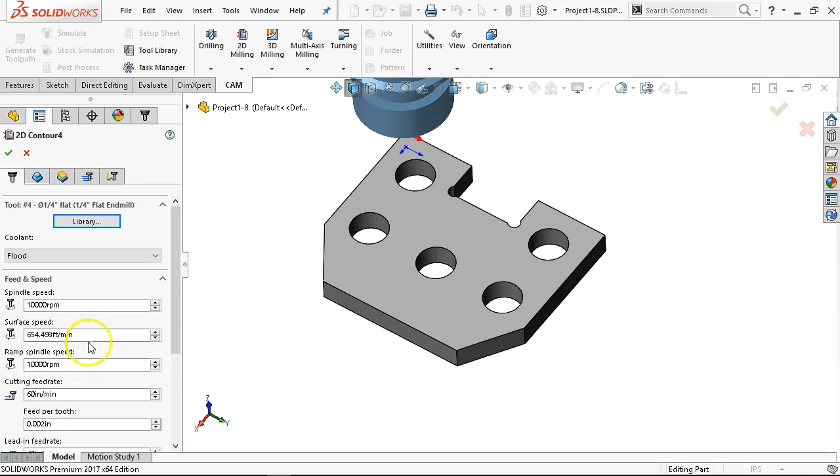Probably not. The 10,000 RPM I'm not so worried about. The 60 inches per minute, yeah, going into that corner, I'm expecting that to be aggressive. The 1/2 inch tool I would expect can handle it.

Oh, I made it worse. I went to 5,000, so I was going to go to 1/2 thou. 15 inches a minute. All right, I'm thinking 15 inches is still a little on the aggressive side, but manageable.

The selection, we'll go tangent propagation. Wrong direction, I'm inside of the part. I can tell that if I'm climbing going that way, then I want to reverse. If you can identify that on the first selection after we turn the propagate along Z off, then that...

Will save having to search for it on the others. The other thing is, if we were just going to run this face and this face, then we would have individual control, as opposed to setting up this chain and having that arrow pretty much affect all of the selection.

So contour, I made it my default. I'm at 0.9, I'm at 0.1. It might have come over just because we had it selected, but we'll go ahead and stay with -0.03. How about 0.03?

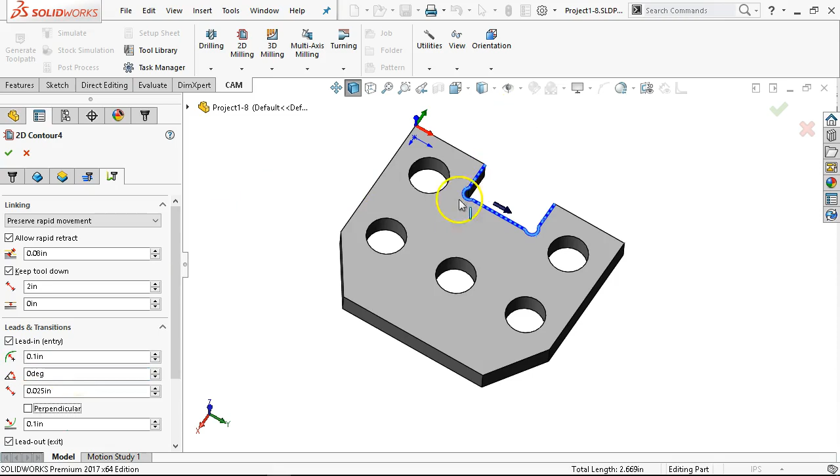And we'll go ahead and turn the wear on. Nothing really there, stock to leave is off. Again, we're going to leave slightly larger numbers, and that can go to 0 because we're just going to have it step in, come straight in. I'll go ahead and give it another 0.1 there. No need to ramp, it's going to go in, come out.

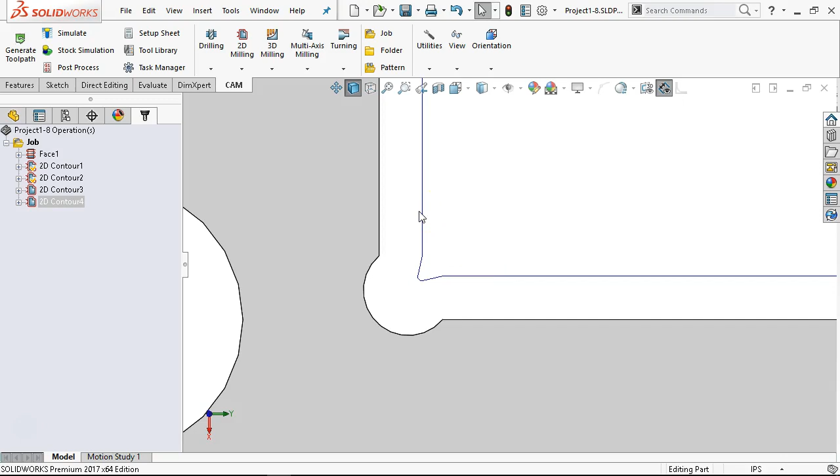Alright, let's see, get back to my view. So this is still going to be a little bit of a heavy cut going into the corner, but I may find that I have to slow it down to 10. Maybe it'll take 15. And a little bit of a jog there, kind of off to the side. Not worried about it, it's looking for clearances.

So we make sure we save it. Facing operation could be used again, so we flip this over, we put it on the same work offset. It's now shifted over by however much material I told it to take off. So if I told it touch off on this edge of the material at the work stop and take 60 thousandths of material, I now shifted the part over 60 thousandths.

So is that a big deal? Probably not. I could post this out from the same face. If it needed to be a second operation, I would have a machine orientation 2, maybe. Or for the view, we go ahead and set up a new job.

And the face is now there. Oh, it didn't stay, so I'm going to have to Z-axis. Reverse, no, I don't think that was a reverse. Oh, I haven't set the x-axis yet.

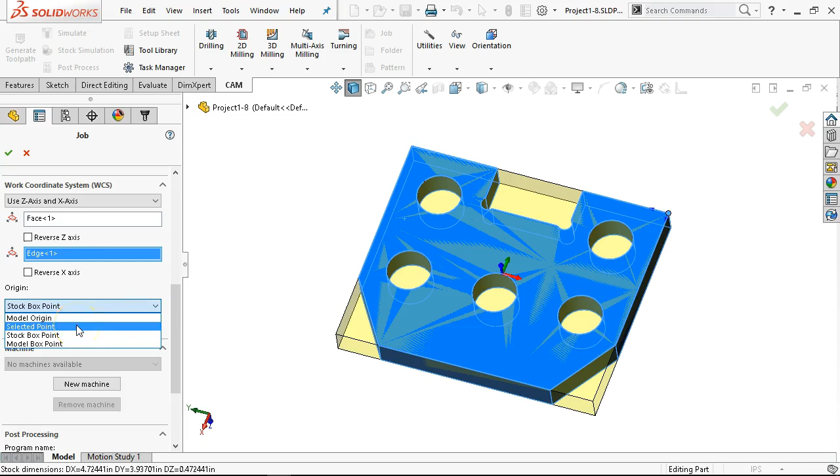So pick, x-axis looks okay. Selected point, go to the corner. Program name. P1-8, setup 2, and the work offset can stay at the same G54.

So the question is, taking that 1/8 inch of material, do I need to put the 1/2 inch tool back in and rough off 1/8, or will my facing tool take care of it? If the facing tool will take care of it, then we're just going to duplicate, and I'm going to drag that operation from one job to the next.

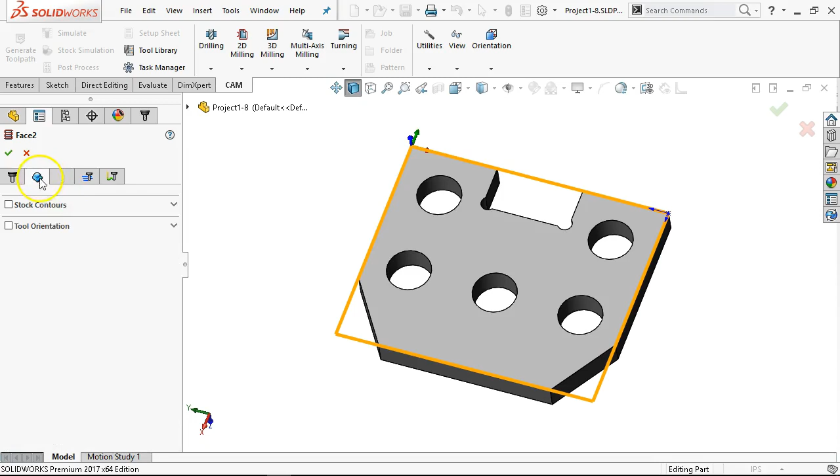The orientation is wrong, the selection is wrong, but when we go through and make the edit, it finds the new stock, has the same parameters, still set to stock contours in the new orientation, and it's okay with those numbers, okay with the lead. Go ahead and accept.

And the critical question is, are my arrows going the correct direction? Because if they're pointing down coming from the other way, I got a little bit of a problem. Alright, as long as this is coming in, making the cut.

Now 200 thousandths for the clearance plane, I got to think about that, because I have somewhere between 90 thousandths and 1/8 of an inch of material that we're going to blast off with this 4-inch facing mill. Do I have enough clearance that if the overhang is kind of in this area, is it going to be coming down in material and then ramping in, or do I have enough clearance to be clear of the part and come in on that face?

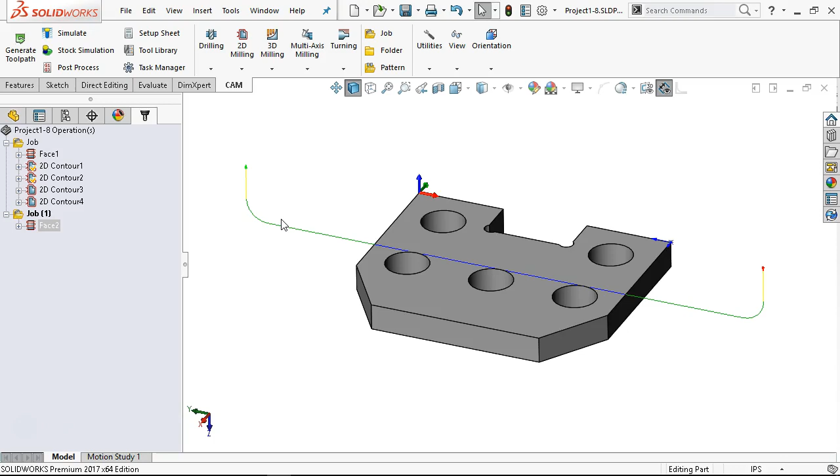Alright, that's another one of those. We go to 5% on the rapid in overrides, and we walk it in kind of slow and make sure that the first article that we get a good part.

So except for the little islands in the corner and the little island in the middle, I'm fairly confident we can run this and get a good part out of it. So let me go ahead and save this, and we will take questions.